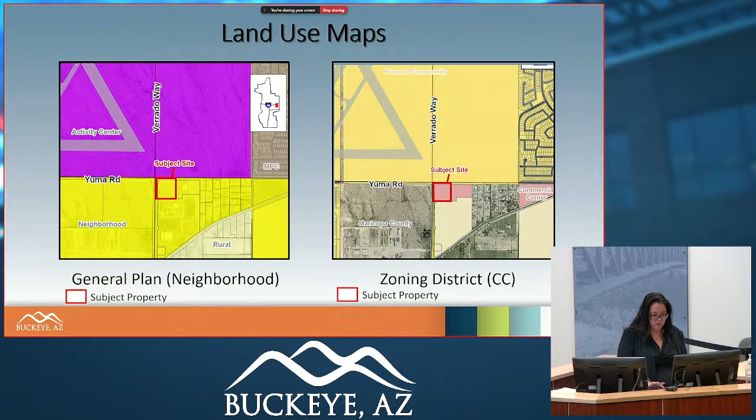The particular site details for this is a self-storage facility that is going to be approximately 130,000 square foot building. The self-service storage facility is required to have 10 parking spaces and is providing 11, along with 2 loading spaces. For this site, you'll see that there are 2 vehicular access points to the site, one from Verrado Way and then also on Yuma Road. Both access points will be right-in, right-out only, and I'll have a little bit more detail on the next slide. And then, as you can see, to the north side are the future proposed lots B and C.

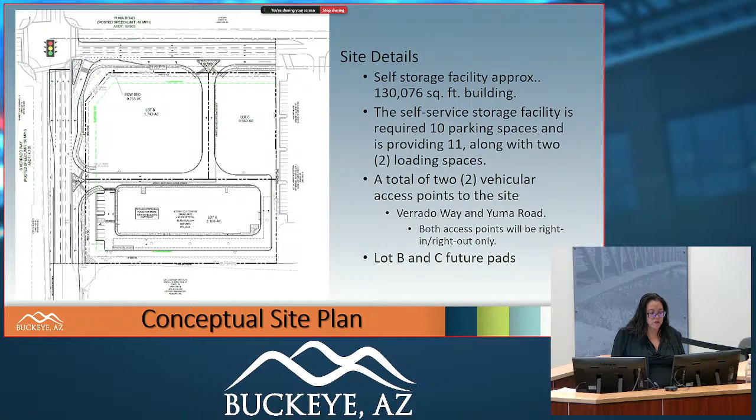I did want to mention that right-of-way dedication will be required for the improvements along both Verrado and Yuma Road. Those improvements will be with the fee-in-lieu payment contributed by the developer, since there is a CIP project planned for that hard corner and traffic signal light. The water and wastewater will be provided by the City of Buckeye, and again, the developer will need to complete any improvements needed to serve the development.

I wanted to show this. These exhibits are also part of the site plan that was included in the staff report. I just wanted to show side by side.

On the left-hand side of the screen, you can see the access off of Yuma Road, a right-in and right-out. You can see that the developer is required to have internal access down to the very southern portion where the self-storage will be located, indicated in pink. The brown hashing shows the existing current roads, and all of the improvements are temporary.

So the ultimate build-out for the half-street improvements, as you can see on the right-hand side, there's going to be a slip lane. So when you're traveling up north on Verrado Way, you'll be able to turn right up onto Yuma.

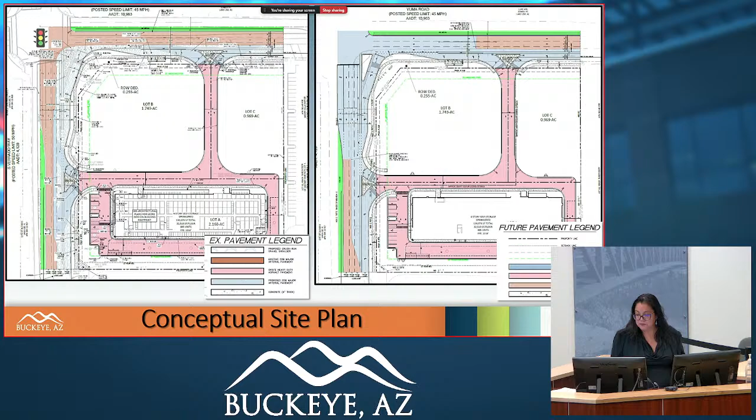When reviewing the site plan, we also go over their conceptual landscape plans to make sure it's in compliance with our development code. Commercial requires a minimum of 20% landscaping for commercial uses. We also have in our code a 25-foot landscape setback along Verrado Way.

As you can see, just adjacent to the self-storage, there's also a 30-foot landscape buffer along the southern boundary of the property, separating the development from the existing school site.

And then, of course, all right-of-way landscaping along both arterials, because this is a master site plan, they'll be required to landscape the full site.

We also look at the architectural elevation renderings, and this is also for your review and approval for tonight. As you can see, I slipped in some different slides, and I'm going to go over them quickly, but I just wanted to show you these contextually.

What you're seeing now is not the front of the building, but internal to the site. This is what you'll see on the north side of the building. This is the back of the self-storage building that will be facing that 30-foot landscape buffer, and what you can see from the pickup and bus line from the school. So that's the rear building elevation.

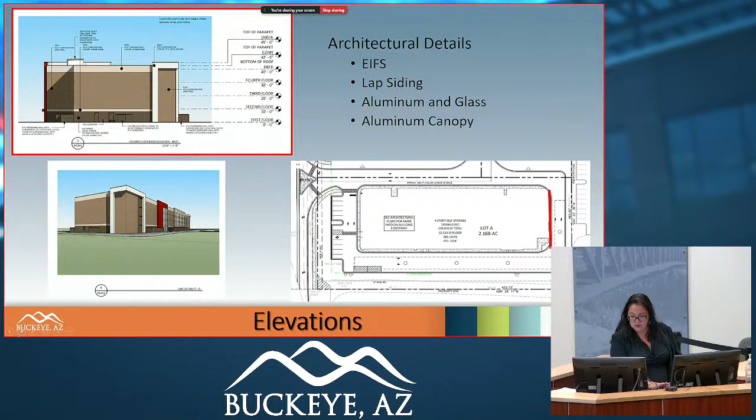For site plans, there was a notice of application done back in December of 2023, as soon as they had submitted the application. No neighborhood meeting was required for the site plan process. Staff has not received any public comments, and there's no opposition to the proposal.

The proposed site plan request furthers the intent of the general plan land use, which allows a mix of residential and commercial uses for the general land use map. The corresponding use, which is self-storage and also future commercial development, represents an overall improvement that will result in a development that is contextually sensitive to the surrounding areas.

So before you tonight, staff recommends approval of item 4A, which is PLZSP 23-00034, storage and retail, subject to the conditions of approval A through Z, outlined in the staff report to the Planning and Zoning Commission. That is the end of my presentation. If you have any questions for me, I am available.

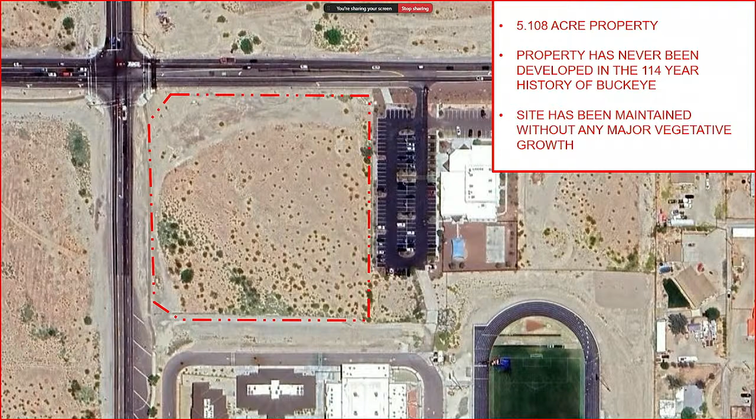As you can see here, this site has been vacant for over 100 years. You can go to the next slide.

A little bit of our intent here with our Class A storage buildings are hours of operation. We have 2 employees, 9:30 a.m. to 6 p.m. We typically allow our patrons card access and allow them to gain entry from 6 a.m. to 10 p.m. As Ms. Marquez mentioned, we worked diligently with the city of Buckeye staff on the architectural detail, which I'll get into a little bit later.

Storage is a very low impact use. Traffic-wise, it's probably one of the least traffic-generating users in the real estate sector.

One thing we'll be doing here is keeping our trash facilities located within the building. That's one thing we've learned from operating a few of these throughout the country - if you have trash enclosures or trash cans on the exterior, patrons tend to dump a lot of their stuff there, and we want to avoid any mattresses or anything of that nature going in the exterior site. You can go on to the next page, please.

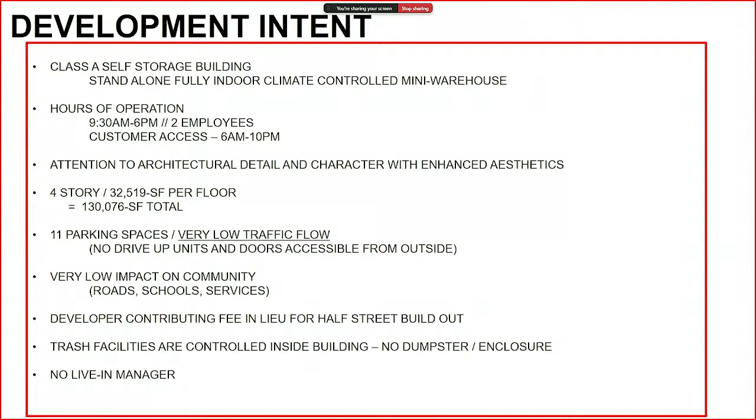Okay, we kind of went through this already, so I won't bore you again with the access points and the location of our buildings. You can keep going.

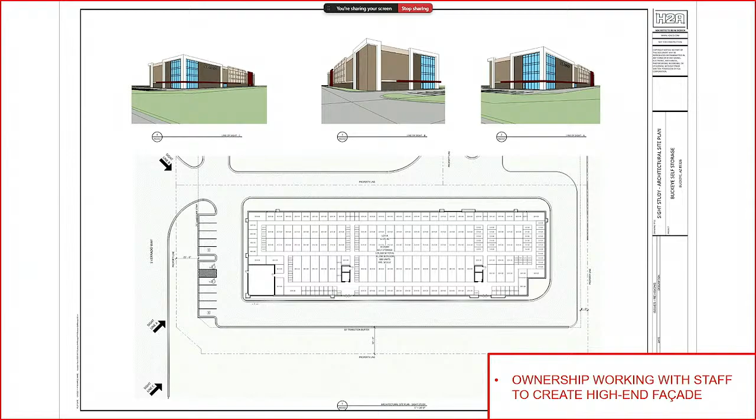Yep, we've got the elevations here, and you can keep going as well. I'll talk to you at the renderings - I think it's in 2 slides. Yep, one more.

This is a rendering we put together just showing that this isn't your standard storage metal building. We've worked diligently with staff, as I mentioned, to put together an aesthetically pleasing building with multiple wood hardy plank, aluminum covering of HVAC units, and indentations throughout the building to really break up the facade and bring Buckeye a really nice building.

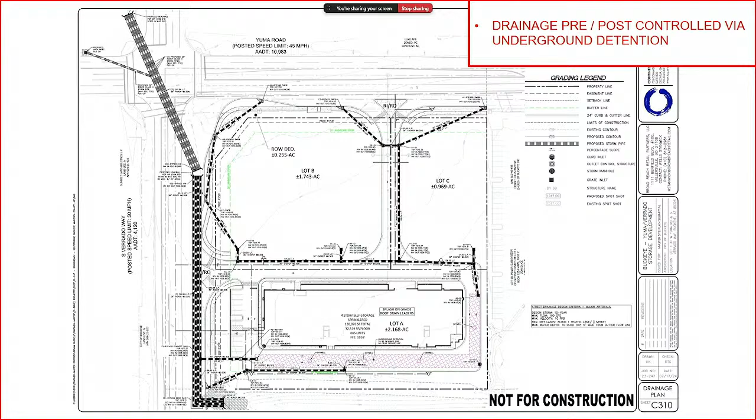You can go on to the next one. Just here, our underground detention - we'll be managing that all on site. You can even see we'll be building a very large infrastructure for the city of Buckeye in the main street, and we'll be retaining that as well. On to the next slide.

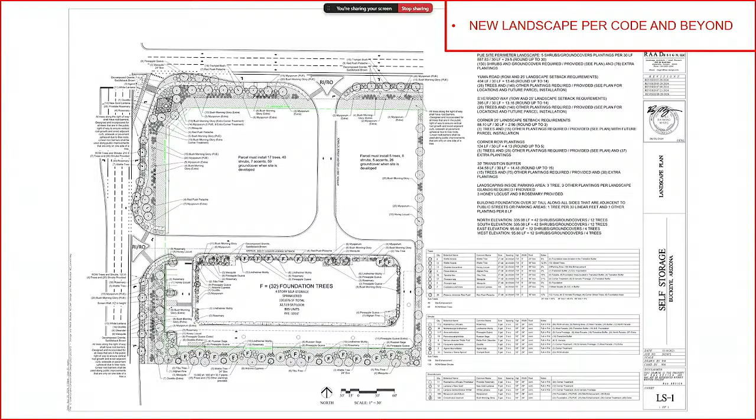Landscaping - this was another one that we went back and forth with staff a ton on. We went above and beyond on code here to really dress up this site and bring in the future retail of the out parcels. Hopefully we'll have some good users there, and bring a site that really...

Perfect, and then the lighting. This was just another one that we wanted to kind of point out. We'll be managing almost a 0-foot candle at the property line. All the site poles will be within our site and cast downward.

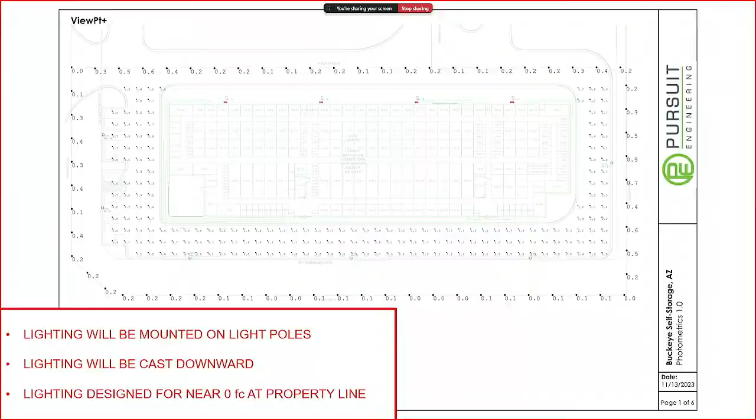So that is all I have for you. I can answer any questions. Thank you.

Commissioners, starting with you, Mr. Belshi.

Good presentation, like the project, and thanks for noting the night sky ordinance - that's much appreciated. I did notice that most of the trees are on the north side of the building, which means the south side is going to get a lot more sun exposure. Not sure if that's going to create more of a heat island, if you've looked at that. I also noted the 11 parking spaces are on the west end, but there's doors throughout the building, so are they able to park in those driveways, or how does that work for access, and potential fire department issues.

So we will - if you can go to the site plan, that'd be helpful, just so I can see the building. Want me to go to, sorry - site plan, please.

Yep, right here is perfect. So typically we'll have them park in the parking spaces. They'll come through one of the main access points where we locate our elevators, so they can come right up into an elevator. And obviously when we go in for building permit, all of our plans will go to the fire department for approval.

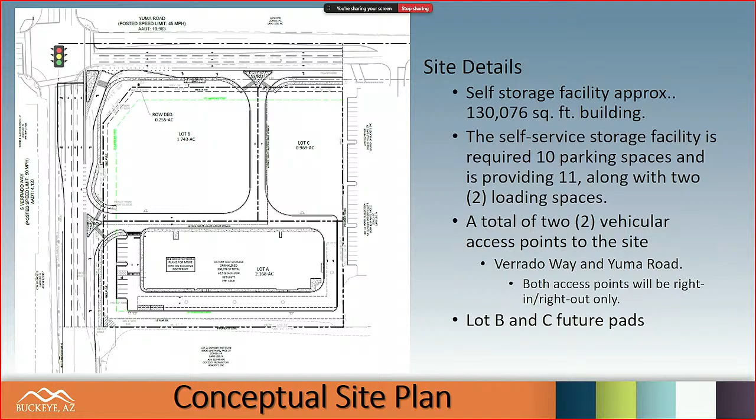Good point on it being elevator required, so yeah, makes sense. Yeah, and we usually have two elevators in a building like this, along with two staircase shafts for emergency exit. So that's the other doors that you'll see on the building, and then some other entry points and access points.

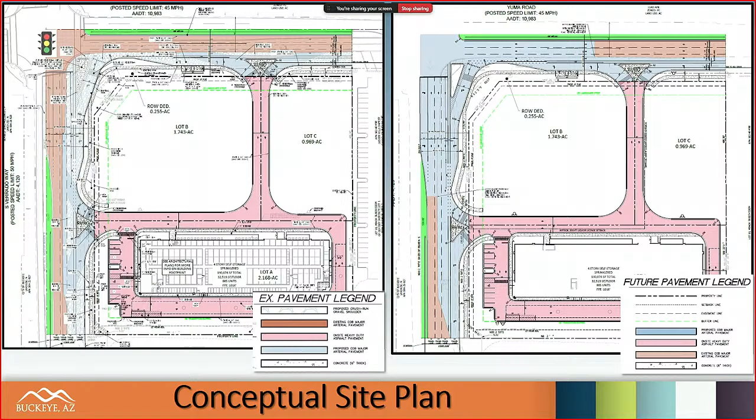Thank you. Thank you, Ms. Cupsack? Thank you, it's a beautiful building.

It will be, it's very striking. My only question, concern, is both the ingress and egress right in, right out? Will that cause people going up and U-turning and coming back to get in, or you don't think that's going to be much of a problem?

The right in, right out was dictated by the city. This is what they've told us we're going to be allowed to do. So I know the reason for the right out was to keep it safe from people exiting our property taking lefts, given the arterial road and the future median that will go all the way through. So if they were to U-turn, it'll be in compliance with what the city of Buckeye plans for their ultimate road configuration. So I guess I would imagine as that gets planned out, if there's a U-turn, it'll be a safe U-turn condition.

Both of these streets in the future ultimate build-out will have medians in them, so that would prevent any sort of illegal U-turns. Certainly somebody would be able to go past and turn at a signalized intersection or something like that.

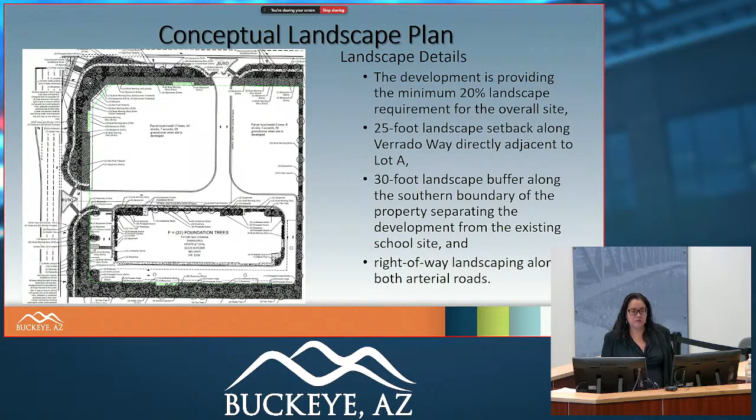Okay, thank you. Mr. Tripiano. I think it's a good design.

The only problem I have with this, I know it's minor, but trash. In a perfect world, yes, everyone would haul away their trash. But I've been around enough self-storage places to know that's just not going to happen. Without a dumpster there or a place to store the trash, what is the plan for that? Because we get some big ones here, and we just don't need trash flying all over the place.

Yep, we will have a dumpster. It'll just be internal to the building.

Okay, because the way it sounded in the narrative was we'll have a dumpster, and an internal dumpster so that if our patrons wanted to come into the building and dispose of their trash, they could. I guess what I was trying to get at is if we just have an enclosure on the exterior, it doesn't stop other people who aren't actually paying members of the storage units from coming there. Somebody could come and just dump all their trash there or leave it on the exterior. So we will be taking care of trash on the exterior of our site for anything that blows out or is there.

All I was saying was we like to keep our trash enclosures internal to the building, and then we haul them out and work with the local trash municipality for hauling off all trash. Okay, because in the narrative it sounded like the customers had to take care of their own trash, which I don't think will be 100% all the time. Yep, and with the future retail, we would obviously have trash enclosures for those. It's something we've learned with storage - we try to keep it internal, so if they want to come into the building and dispose of their trash, they can. We just try to make sure they don't come and dispose of their trash while they swipe their cards.

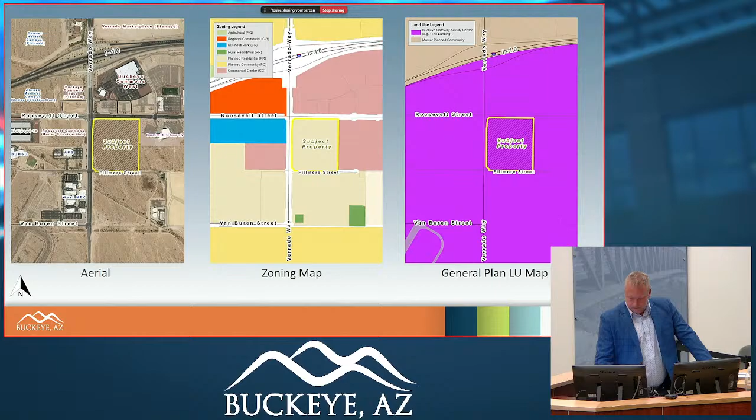So the gist of the request tonight is to rezone the site to planned area development. As you recall, about 8 months ago, the Planning and Zoning Commission recommended approval of a development code amendment, and the council ended up approving that, which created the PAD zoning district. We used to have a PAD overlay that we could apply on top of other zones. This allows us to do very unique projects where you can provide mixes of uses and create internal use boundaries, if you will, and that's what we're proposing here today.

The remainder of the center would be commercial uses from a tailored use list. I'll talk about the specific uses we exclude in just a second, but we've narrowed down the uses to make sure this is a really vibrant, fun, walkable environment. The commercial area would be accessed via Roosevelt to the north.

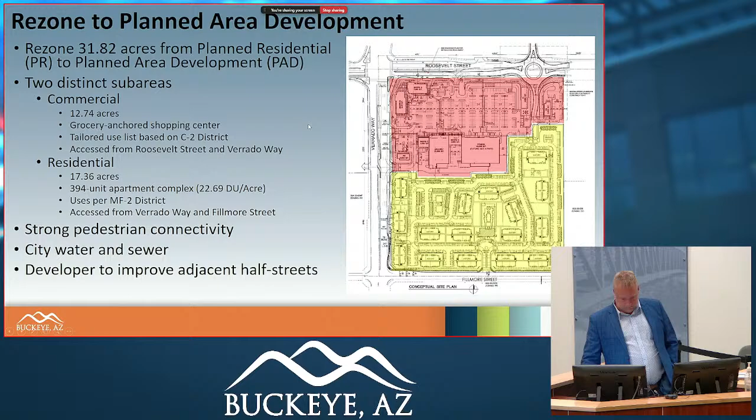The PAD does allow us to make some tweaks to development standards. Basically, staff works to tweak the development standards with the developers to make sure we're meeting the intent of the area - in this case trying to create that vibrant area within the landing. But also if we do make some trade-offs, if we give a little here, we have the expectation to get a little to offset for that.

In this particular case, all of the development standard modifications are supported. We do increase street side building setback, which would apply adjacent to Roosevelt, Verrado, and Fillmore, from 0 feet, which is allowed, to 8 feet. That will allow a little bit of landscaping - not a suburban 20-30 foot buffer, which kind of defeats the purpose of an urban type of design, but just enough to add a little greenery to the street frontages. The internal setback, which only applies to the east, adjacent to the Summer Church property, would be reduced to 0 feet.

That's really in keeping with the desired urban style of development here, where you can maximize use of the property. Building height would increase up to a maximum of 80 feet.

There are no plans by the developer at this time to build at that height. Everything here would be proposed for a single story, but in the event it redeveloped in the future and the area was starting to become even more urban, they would have that ability.

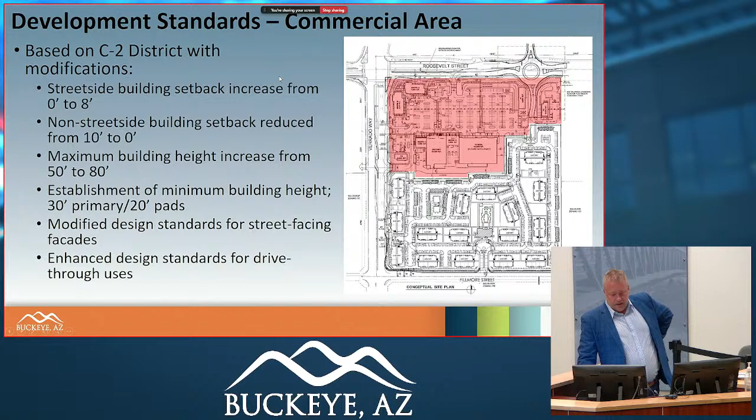There are some modified design standards for street-facing facades, as well as some enhancements in the PAD for the drive-through uses, to make sure those are properly screened and don't detract from the pedestrian orientation of the site.

Very similar for the residential portion, same street side and internal building setbacks. The MF-2 district doesn't have a maximum height, so we established one here as a cap so people would be more comfortable. There's a suburban-style code requirement that any building within 50 feet of a street, if 3 stories, can only be 2 stories in that first 50 feet, then step up to a third story.

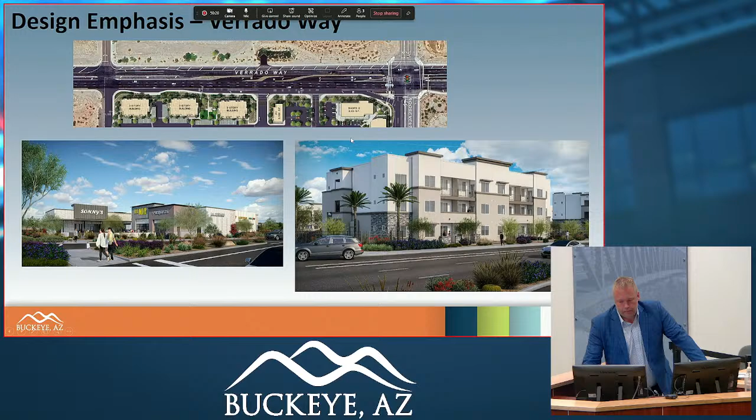You can see the site plan view of Verrado, how the buildings are basically along almost the entire frontage pressed up to the street. There are some small gaps where there's parking, but those are smaller lots with a lot of landscaping provided. There are no drive-throughs currently proposed along that frontage, so it'll feel much more like a traditional pedestrian-oriented retail area as well as residential.

This graphic in the lower left is the rendering of the project. If you're standing here, I don't recommend you actually take a picture.

Thank you. Much better than the hand sanitizer. I think so. Doesn't kill COVID, but probably that doesn't either.

All right, back to the matter at hand. This rendering is from the perspective of standing at the intersection of Verrado and Roosevelt, looking southeast into the project. You'll have two retail buildings that converge and create a shared outdoor dining, pedestrian-oriented area to activate that street frontage, with retail continuing on from there.

This is a typical residential elevation adjacent to Verrado. You see taller-looking buildings to create that urban vertical form we're looking for. You also see that a lot of apartment complexes like to put the wall on the outside of the project, so it feels like an insulated community—once you're inside the walls, you live in your own paradise.

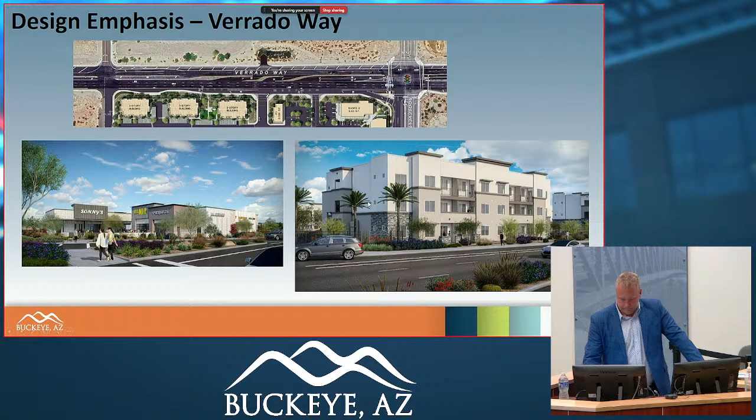The PAD is consistent, in staff's belief, with what we're working on at the landing. What we're trying to accomplish is identified in the general plan, which calls for a mixed-use vision for the area at higher intensity. The design emphasizes the pedestrian, not only putting buildings up at the public sidewalk adjacent to Verrado, Roosevelt, and Fillmore, but also internally providing shaded connections.

We didn't talk about uses yet, but we eliminate or heavily restrict a handful of uses in this proposed PAD. Auto-oriented uses—auto repair, car washes, gas stations—are not permitted within this PAD. The one exception would be a gas station if the grocery store itself had a gas component, but a freestanding gas station or convenience store would not be allowed.

Some lower-end retail uses, like pawn shops, are prohibited. Thrift stores are restricted in size, so you wouldn't be able to have a very large one—5,000 square feet max. And at risk of offending the prior applicant, some lower-intensity commercial uses like storage, which aren't necessarily consistent with the vibrancy of the area, are also not included, since we want people walking around and a storage facility typically won't create that feel.

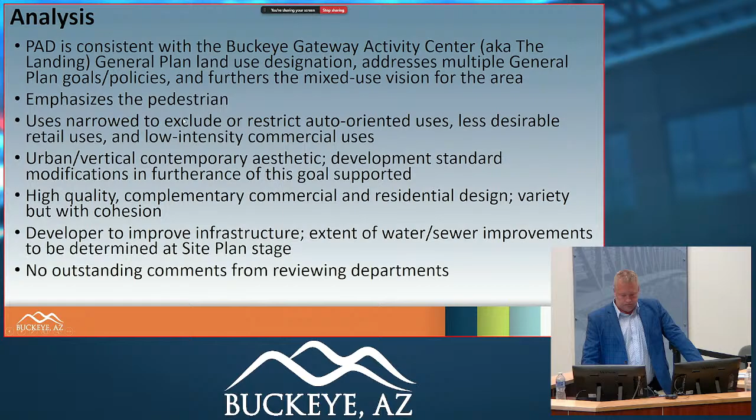Public participation - we did have a neighborhood meeting. It was very quiet, just me, the applicant team, as well as Councilmember Eustace in attendance. No general public. We've received no written support or opposition to this project throughout the process.

Both the elementary school district and high school district who will serve this property have been notified. Of course, this will create some student needs here. Liberty Elementary School District has responded that they anticipate having adequate capacity, so no need to do anything with them. The developer is working with the Buckeye Union District on a donation agreement.

Of course, all of our standard notice requirements have been met for this hearing.

So with that, Chair, staff does recommend approval of the project of this proposed rezoning, subject to conditions A through Z. I did want to note that we sent out a memo yesterday with some very minor modifications to some of the stipulation language. I don't think it's anything P&Z would care about - it's very technical, when triggers what, and whatnot - but we wanted to share that with you, and that's the recommended language tonight. So we would recommend approval subject to conditions A through Z, but as stated in yesterday's memorandum.